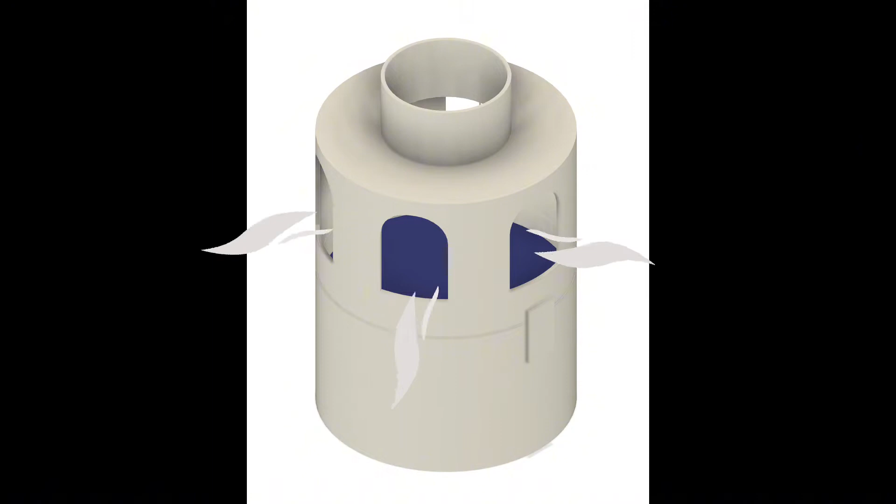This kind here, you fill the bottom of the bucket with water and the dryer exhausts into this bucket. The air comes out of these holes and the residual lint in the air is supposed to be captured by the water bath. These require the water to be changed out and refilled regularly. And obviously you're still going to get some fine lint inside the building with just those open holes.

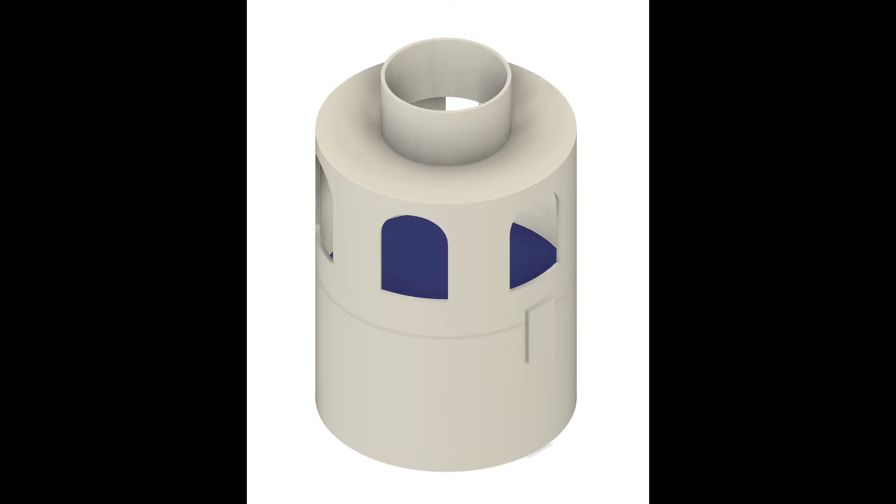But you always want to check with your local authority having jurisdiction to see if local code will even allow you to do this. I would not recommend this, particularly in a residential setting, because they do require maintenance, and if people forget, it could lead to potential fire hazard if you have a buildup of lint inside that collection box. If you have a buildup of lint, that filter gets plugged, or that water bath doesn't collect all the lint, you're going to have fine lint getting in the air, and if people breathe that in, it's not good for your lungs, and it can get sucked into electronics in your house or building or other appliances.

The other issue is if you restrict the airflow through that filter because it's clogged, you're going to potentially overheat the electric heating elements in the dryer or cause excessive moisture buildup in the dryer, causing it to potentially rust metal components, reducing the lifespan of that dryer and efficiency.

The other issue with dumping the dryer exhaust into an occupied space is you're affecting the indoor air quality of that space. Because think about what you're doing. You're dumping warm, moist air into the space. And especially if you live in a humid environment, that could be problematic, could lead to potential mold or mildew issues. Just something to think about.

So this installation, behind one wall was solid bedrock, behind another wall was a gym, behind the third wall was a maintenance shop, and then behind the fourth wall was a parking garage, and you had a 3-story commercial office building above. So there was no realistic good way to duct this to the outside. That's why they did this.

So what does building code say? The International Mechanical Code, section 504, says that clothes dryers shall be exhausted in accordance with the manufacturer's instructions, and dryer systems shall convey moisture and any products of combustion to the outside of the building. So if you have a gas-fired dryer, for example. Dryer exhaust ducts shall terminate on the outside of the building and be equipped with a backdraft damper. The exception to this section would be heat pump ductless clothes dryers.

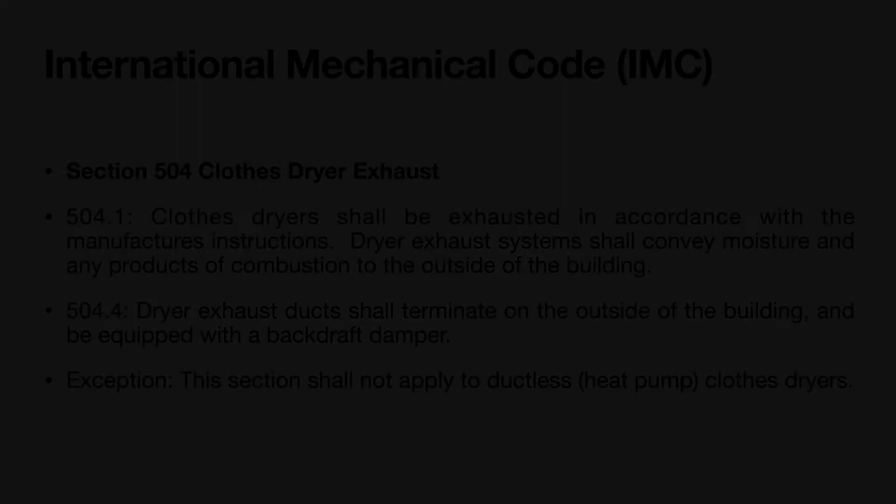And the International Residential Code, section M1502, basically says the same thing. Clothes dryers shall be exhausted in accordance with the manufacturer's instructions. Exhaust shall convey moisture outdoors, and the ducts shall terminate on the outside of the building. And again, this section does not apply to ductless heat pump style dryers.

So what are some options for you if you live in an area or you work in a building that does not have a dryer exhaust hookup already? Well, you can have one installed. Relocate the dryer to another area of the building where it's more cost effective and appropriate to install an exhaust duct to the outside, or consider purchasing a ductless heat pump dryer. Some areas may offer tax incentives or rebates for doing that. Just FYI. So I hope this information is helpful.